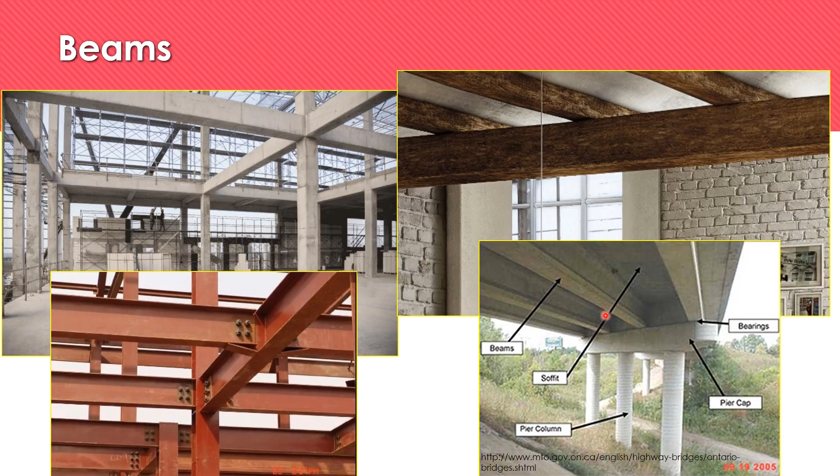So yung mga horizontal elements or members that you see in these structures are what we call as beams. So what is a beam? The term beam refers to a slender bar that carries transverse loading, that is, the applied forces are perpendicular to the bar. In a beam, the internal force system consists of a shear force and a bending moment acting on the cross-section of the bar.

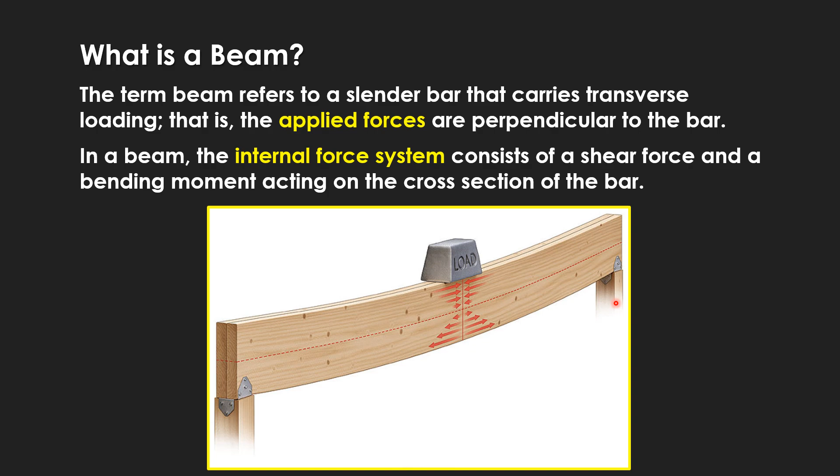So, anong gagawin nitong internal forces? So, this will give rise to two kinds of stresses on a transverse section of a beam. And these stresses are the shear stress due to the shear force and bending or flexural stress that is caused by the bending moment. Okay, so we know that a shear stress is a type of stress caused by a force which is parallel or tangential to the area.

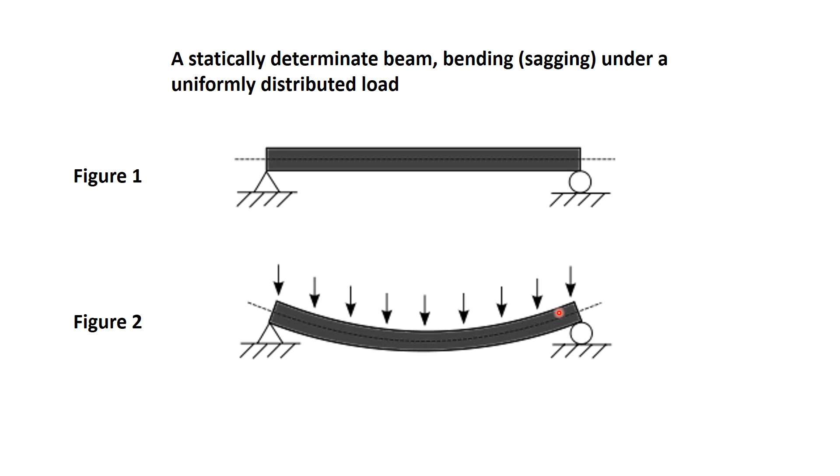Now let us first define or discuss types of beams according to supports. Although yung iba dito familiar na kayo, like the statically determinate beams. In one of our topics, we discussed about statically indeterminate structures. But here, i-group natin yung statically determinate and statically indeterminate beams para makita natin yung kanilang difference sa itsura at sa supports. Now, statically determinate beams are beams in which the reactions of the supports may be determined by the use of the equations of static equilibrium.

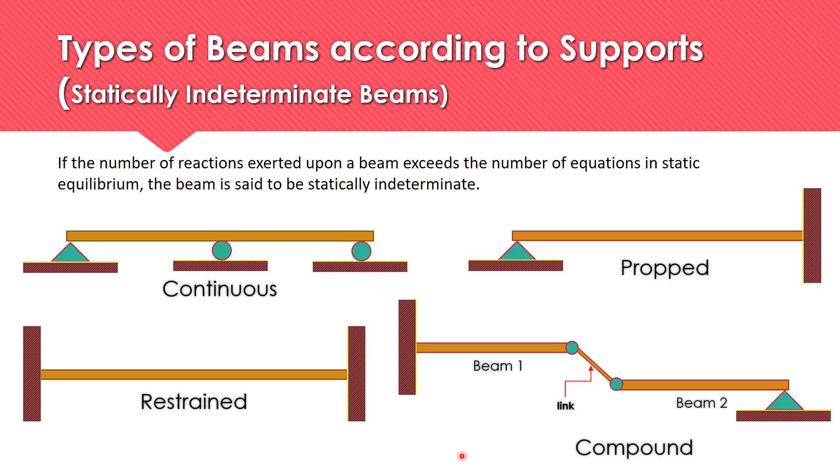And we have a compound beam. So we have here two beams, beam 1, beam 2. Yung beam 1, fixed at one end. Beam 2, may hinge sa isang end. And the two beams are connected by what we call as a link. So these two beams form a compound beam, and it is statically indeterminate.

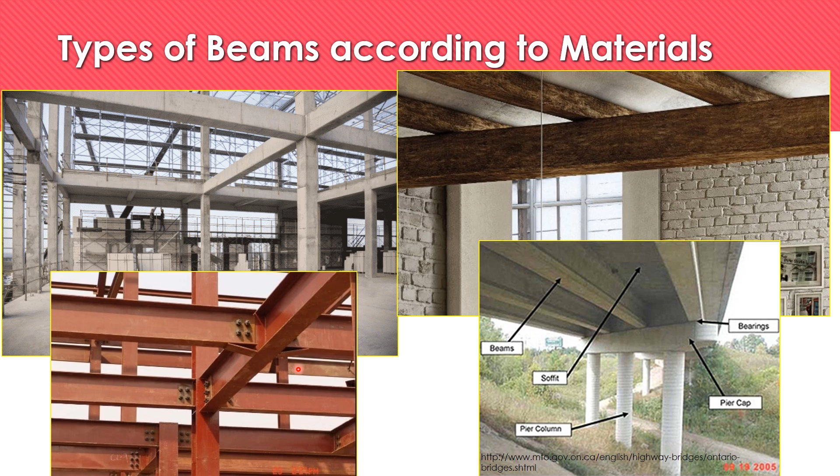So these are the same pictures that I showed earlier, but this time I want to give emphasis on the types of beam according to materials. As you can see, the beams in the pictures use different materials. Merong made of concrete, merong steel, merong wood or timber.